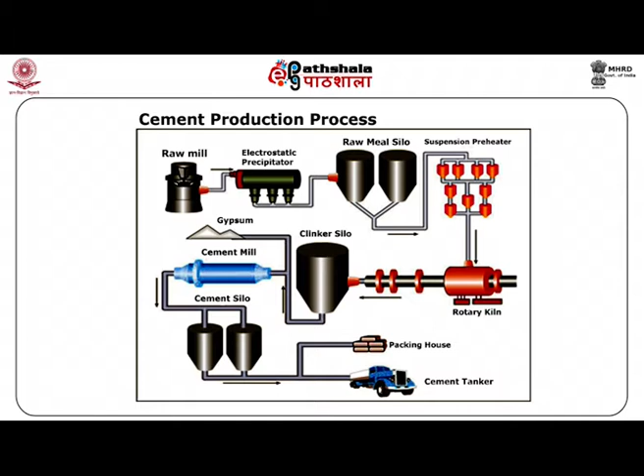The figure shows the manufacturing of cement in a cement mill. The raw material is introduced into the mill, from where it passes to electrostatic precipitator. Then it passes from the raw meal silo, it is passed on to suspension preheater and then mixed in a rotary kiln. From here it passed on to the clinker silo, mixed with gypsum and further moves on to cement silo. From the cement silo, the ready cement is packed into packing houses or loaded into cement tankers.

Let us now have a closer look at the sugar industry. Sugar industry is divided into two sectors, the organized and the unorganized. The organized sector covers the sugar mills which are producing sugar from sugarcane, whereas the unorganized sector takes into account the small farmers or small scale industries which are producing the traditional sweeteners such as gur.

Distillery. A distillery is basically the industrial manufacture of alcohol by the process of distillation. Distillation is a physical process which involves the separation of components of a liquid by vaporization and condensation. It is a non-chemical process with universal industrial application. Distillation permits separation of air into its components, mainly oxygen, nitrogen and argon, for industrial use.

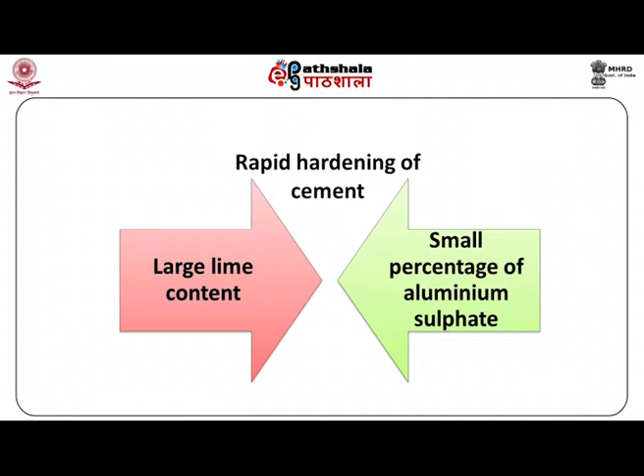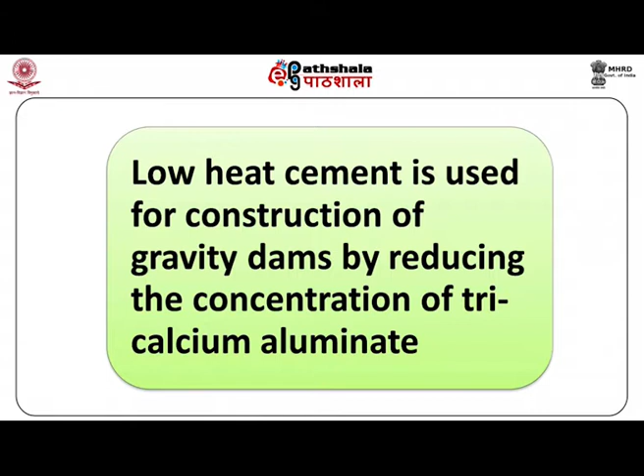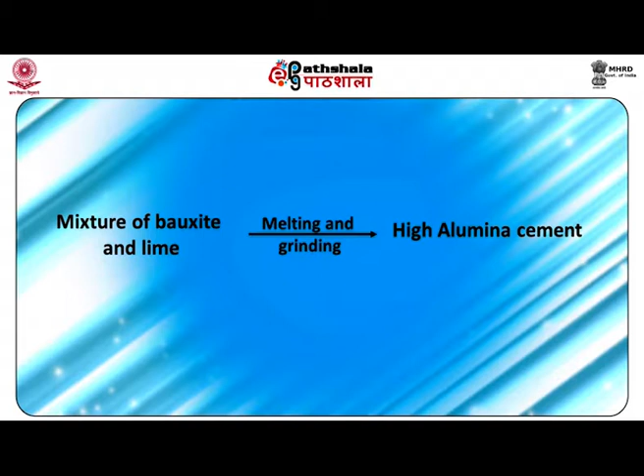aluminum sulfate. Low heat cement is used for construction of gravity dams by reducing the concentration of tricalcium aluminate. High alumina cements are used for construction in high temperature regions. It is obtained by melting and grinding the mixture of bauxite and lime.

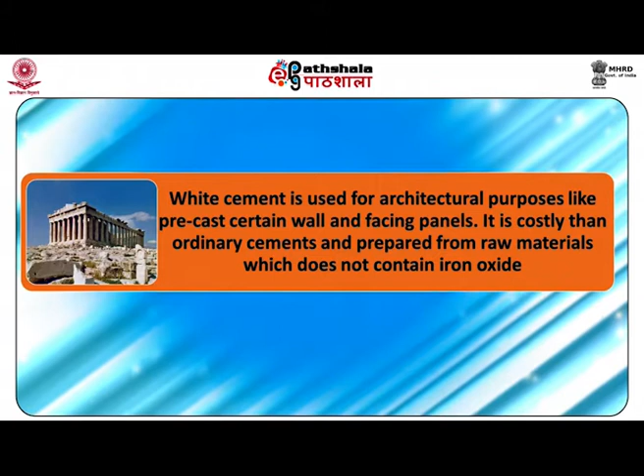White cement is used for architectural purposes like to precast certain walls and facing panels. It is more costly than ordinary cement and is prepared from raw materials which do not contain iron oxide. Colored cements are made up by mixing several mineral pigments with ordinary cement. It is used for decorative works in floors.

Applications of sugar industry. Sugar plays an important role in the manufacturing of food products. Nutritionally, sugar produces energy and economically it is the most efficient foodstuff. It is obtained from sugarcane and has a very high calorie content.

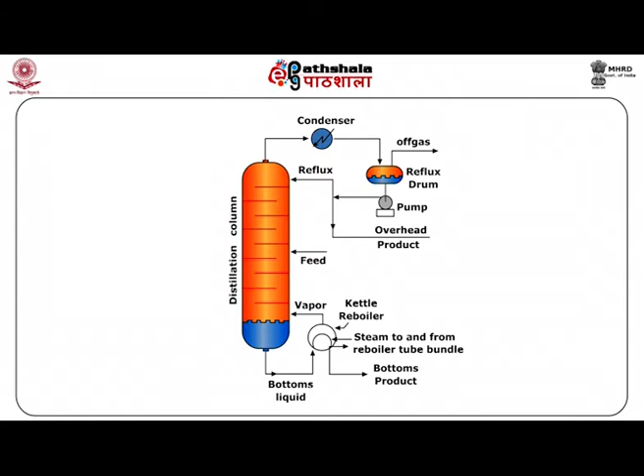Industrial applications of distillery. Industrial distillation has many applications. It is performed in large vertical cylindrical columns known as distillation towers. Let us have a look at this schematic diagram of the distillation process. Alcohol has industrial use in medicinal, pharmaceutical and flavoring purposes.

Despite the many environmental issues, utilization of alcohol can't be reduced. In industry and for several exercises in the laboratory, there is requirement of alcohol. Spirit is also manufactured in distilleries and is used in polishing and removal of paints.

Environmental issues. Manufacturing of cement and sugar causes environmental impacts as the processes include emission of dust and gases causing air pollution. Also, noise and vibrations produced while operating the machinery affect the environment.

Problems associated with the cement industry. 1. Emission of harmful gases in the air. Concentration of carbon in cement is somewhere between 5% to 8%. The manufacturing of cement releases carbon dioxide into the atmosphere directly or indirectly. Direct emission of CO2 takes place through heating calcium carbonate. Indirect emission of CO2 takes place when fuel is burned to generate energy to drive the plant.

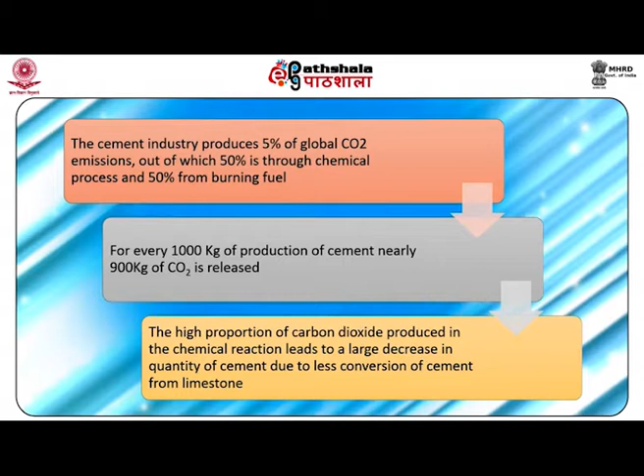The second problem associated with the cement industry is the presence of heavy metals. The high temperature calcination process of limestone releases volatile heavy metals such as thallium, cadmium and mercury, which are very toxic. The presence of heavy metals arises both from natural raw materials and from the use of recycled byproducts.

The high pH prevailing in the cement pore water, which is between 12.5 to 13.5, limits the mobility of many heavy metals by decreasing their solubility and increasing their sorption into the cement mineral phases. Nickel, zinc and lead are commonly found in cements in high concentrations.

Let us now move on to the sugar industry. Sugar is consumed every day by all of us. It has a unique importance, but its production damages the environment. It is estimated that about 145 million tons of sugar is produced in 121 countries across the earth per year. It affects the surrounding soil, water and air. It is responsible for loss in biodiversity due to destruction of habitat by heavy use of agricultural chemicals.

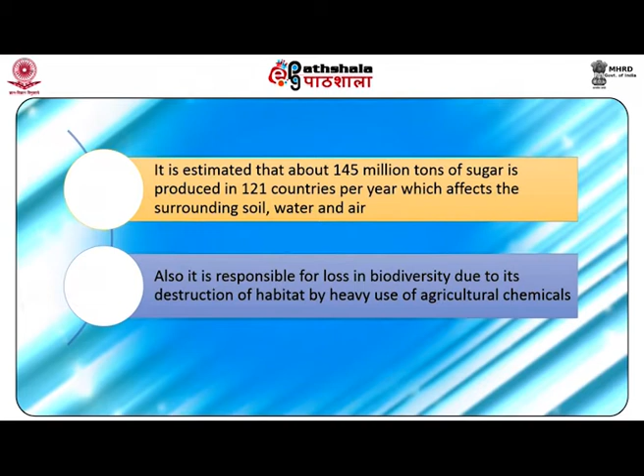The disaster of the Great Barrier Reef in Australia is an example of destruction caused by excessive sugar production. In this disaster, water around the reef suffered from large quantity of effluents, pesticides and sediments from sugar farms. Also, in Papua New Guinea, the fertility of soil decreased by 40% due to heavy cultivation of sugarcane for sugar production.

Air pollution associated with sugar industry. Sugar mills use bagasse as a fuel in boilers. Fly ash is mainly the waste which causes air pollution, which includes unburned bagasse and carbon particles. Fly ash is very light in weight and contains a large percentage of fine particles.

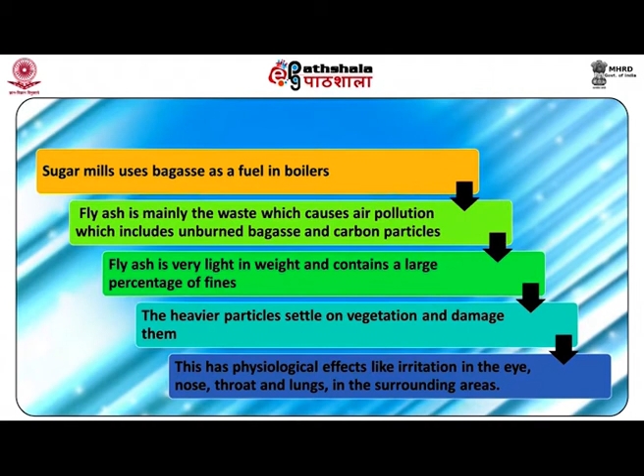These particles settle on vegetation and damage them by clogging the pores. They also have physiological effects on animals and humans like irritation in the eye, nose, throat and lungs. Sugar industry also causes water and land pollution.

In the production of sugar, large amounts of water are used for irrigation purposes, which results in discharge of polluted wastewater. It is estimated that sugar mills generate 98 lakh tons of sugar and 0.16 to 0.76 meter cube of waste for every ton of cane crushed by them. Also, about 45 lakh liters of wastewater is generated by sugar mills per year.

This wastewater, when discharged, gets mixed with water resources. It decreases the level of dissolved oxygen in water bodies. It makes water unfit for fish and other aquatic life forms. Also, when the wastewater is discharged on land, it causes land pollution as the organic waste clogs the pores in the soil.

There are also some ethical issues associated with this. It includes the strikes by farmers for demand of excess payment, which results in higher prices of sugar in the market.

Let us now have a look at the environmental issues associated with distilleries. The manufacturing and consumption of alcohol both have bad effects on human health as well as on the environment. The consumption of alcohol causes liver damage, slows down the central nervous system, and affects cognitive thinking. It is estimated that production of alcohol releases about 3 million tons of toxic chemicals into air, water, and land.

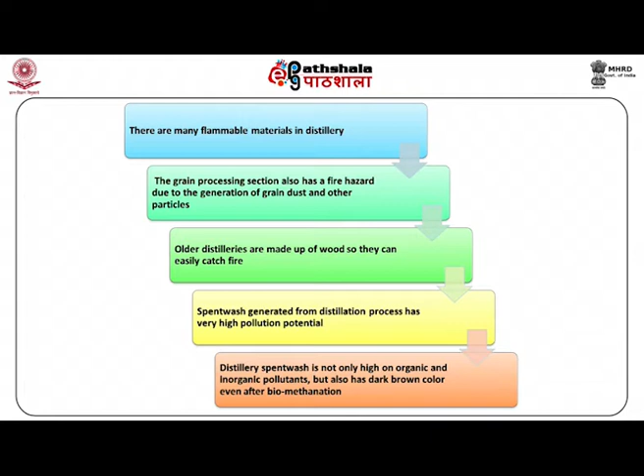The spent wash generated from distillation process has a very high pollution potential. It not only has a high content of organic and inorganic pollutants, but also a dark brown color even after processing. Distilleries are also known to generate huge amounts of toxic gases. The conventional distilleries resulted in change in color and odor of the water in rivers.

Let us now have a look at the prevention methods or the techniques which we can adopt to minimize pollution. The manufacturing of both cement and sugar is very important from economical point of view. Therefore, improved equipment and new techniques should be used in order to reduce the emission of dust and harmful gases. The new techniques can trap and separate exhaust gases coming out from the industries for further utilization.

Environmental protection also includes the reintegration of quarries into the countryside after they have been closed down by returning them to nature or recultivating them. Manufacturing of green cement. Green cement has a higher functional capacity, and also its manufacturing releases less or negligible amounts of carbon dioxide. Therefore, it is considered to be eco-friendly.

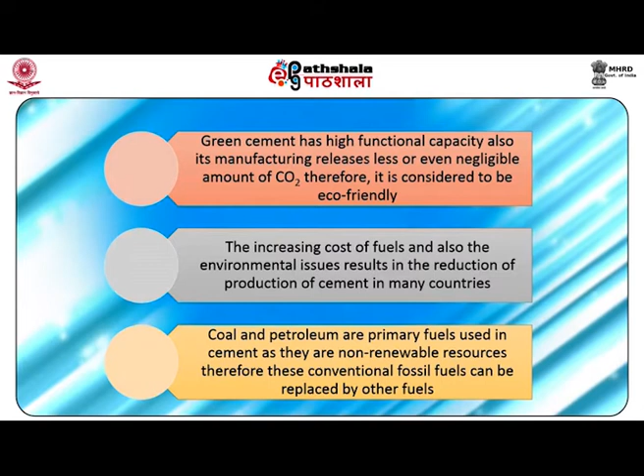The increasing cost of fuels and environmental issues result in decreased production of cement in many countries. Coal and petroleum, the primary fuels used in cement manufacturing, can be replaced by other fuels as they are non-renewable sources of energy. The waste and byproducts which contain useful minerals such as calcium, silica, aluminum, and iron can be used as raw materials instead of clay and limestone.

The cement industry in India is focusing on cost control, upgradation of continuous technology, and increased construction activities. India's cement industry needs to nearly double its manufacturing capacity by 2025. In addition, major cement manufacturers in India are also increasingly using alternate fuels, especially bioenergy like solar, wind, thermal, etc. With the ever increasing industrial activity, real estate, construction, and infrastructure development across the country, there is a growing demand for cement.

Let us now have a look at the improvements that can be made in the sugar industry. Bagasse is used as a fuel in furnaces. These furnaces should be upgraded in order to control air pollution. A number of sugar mills have already installed wastewater treatment plants and air pollution control equipment.

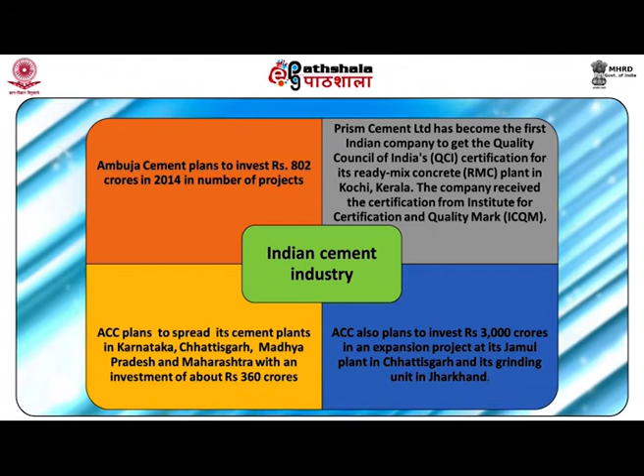ACC also plans to spread its cement plants in Karnataka, Chhattisgarh, Madhya Pradesh and Maharashtra with an investment of about Rs 360 crores. It also plans to invest some 3,000 crore rupees in an expansion project at its Jamul plant in Chhattisgarh and grinding unit in Jharkhand.

Indian prospects of the sugar industry. Sugar, which is made from sugarcane, was discovered thousands of years ago in New Guinea. It was in India sugar crystals were first produced by boiling the juice obtained by pressing sugarcane. There are 453 sugar mills in India, the maximum sugar producing industry in any nation.

The cultivation of sugarcane generally takes place in the states of Uttar Pradesh, Maharashtra, Gujarat, Tamil Nadu, Karnataka and Andhra Pradesh. Uttar Pradesh alone accounts for 24% of the total sugar produced in the nation.

Indian prospects of the distilleries. India is the fourth largest producer of ethanol in the world and the second largest in Asia. India produces about 2.75 billion liters of alcohol per year. Though the production of alcohol from starchy material is also practiced in India, but on a very limited scale. Most of the Indian distilleries use sugarcane molasses as the raw material.